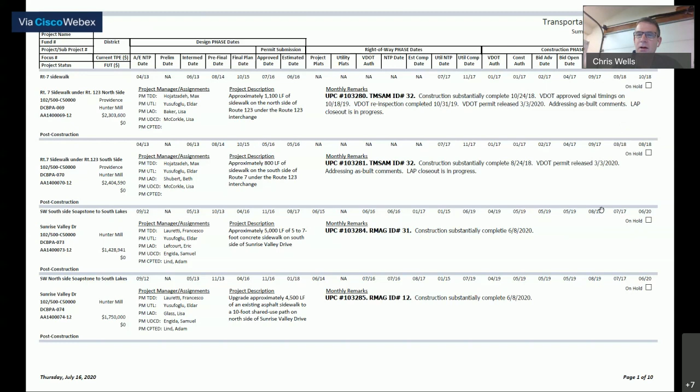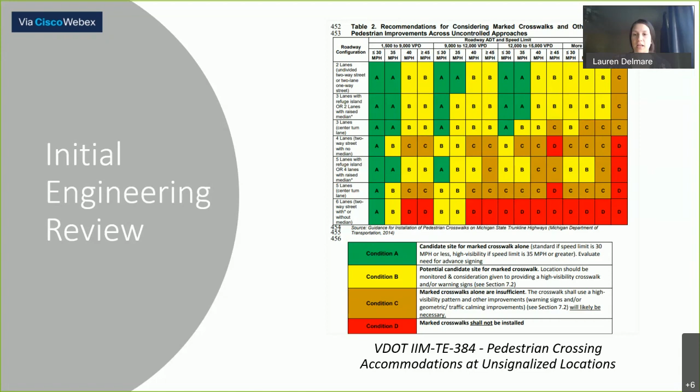Condition D means that under this circumstance, a marked crosswalk cannot be installed. That does happen sometimes with really major roadways, and the only way to overcome condition D is to make it a signalized crosswalk — either a HAWK or pedestrian hybrid beacon, or a full signal.

If there's on-street parking, that sometimes leaves room for a curb extension in the parking lane to narrow the crosswalk. Whenever we have a median, either raised or striped, we look to see if we can get a refuge island. So those are the types of countermeasures we're considering.

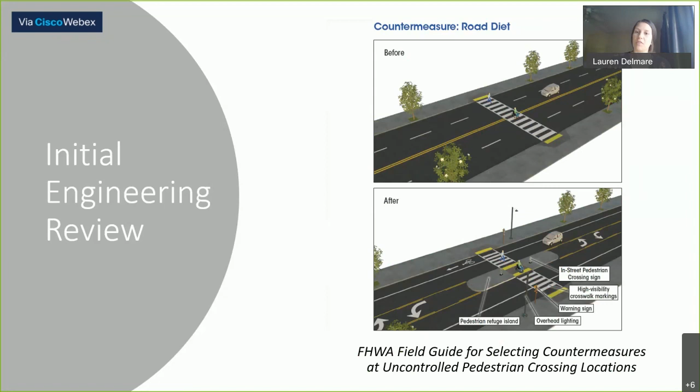Once countermeasures have been identified and we know the cost, we'll document that. Then we come back to look at what implementation and funding opportunities we might have. There's a few that I wanted to talk specifically about today.

The bottom of my list is the transportation priorities plan. That's kind of, we have a project, we know we want to do it, and we're going to need more funding, and we don't have a grant opportunity. That's sort of the last resort.

First, we're looking at the VDOT annual repaving program. Through that, if there's a crosswalk that can just get marked and we know there's demand there, sometimes we can use that program as a means to get that to happen.

We'll also have grant opportunities, so I'll talk a little bit about these as well. There's the Pedestrian Safety Action Plan — we had this in 2018, and it hasn't been renewed to date. VDOT's decided to spend some of their safety funding elsewhere, but there's still potential they'll do this again.

Then we have the Transportation Alternative Set-Aside Program, or the Safe Routes to School Program — those are bundled into one now. Those applications are typically every 2 years; we had a round in 2017, and then another last summer in 2019.

So to talk about the repaving program, this is a chance to add a new crosswalk or upgrade an existing crosswalk to high visibility markings. Those are the simplest things we can do. We can also add crosswalk signage — something Fairfax County does in partnership with VDOT — and we can relocate an existing crosswalk.

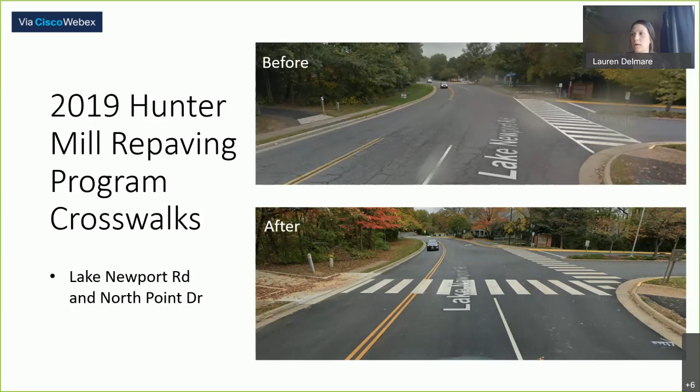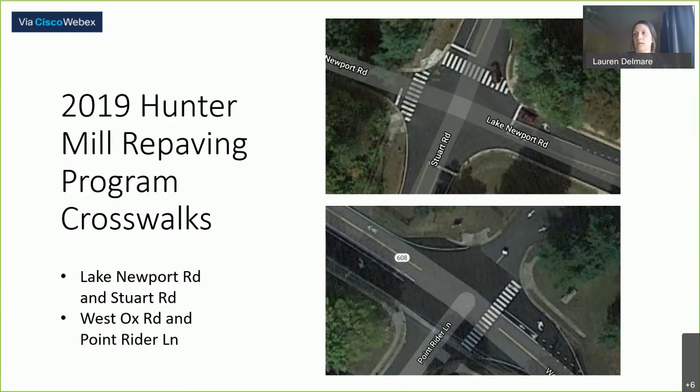This year we're looking at four locations to add new crosswalks: Beulah at Cinnamon Creek and at Abbotsford. At Abbotsford we're leaving room with a painted median to potentially add a refuge in the future if we have funding. At Temporary Road and Old Reston Avenue, we're doing a bus stop relocation for safety as well, and at Glade Drive and Breton Court, which also had a bus stop relocation.

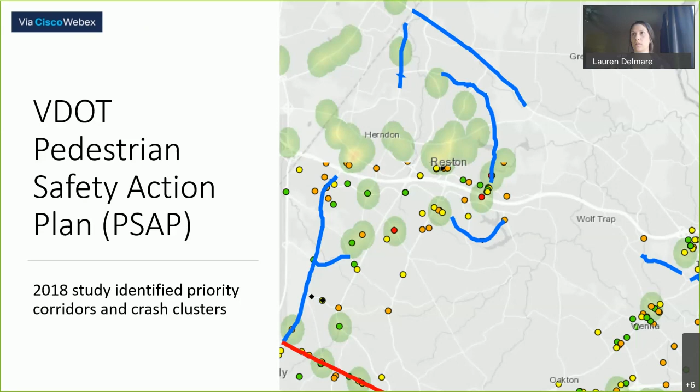The Parkway and South Lakes Drive was one corridor. You can see some of the corridors in your area that were identified through this plan. The funding for the pedestrian safety action plan grants targeted those locations that were either on the heat map or a priority corridor. Applications for these grants opened in summer of 2018.

They had $8 million statewide, and we were granted $1 million based on our applications in Fairfax County. These were quick delivery projects within right of way without utility work, so they had to be done by June 2020, with notification received in November 2018 — a year and a half, which is extremely quick for us. So we worked in partnership with VDOT to make that happen using their contracting mechanisms and design team.

We constructed 14 projects in that time. The scopes typically included rectangular rapid flashing beacons. We had one signalized crosswalk, refuge islands were common, curb ramps associated with these other improvements, and signing and marking improvements as well.

All of these projects had the same scope — adding pedestrian refuge islands and rectangular rapid flashing beacons, most including curb ramp improvements as well. Here are a couple of photos showing the outcome. This is Bluemont Way and Discovery — you can see these rapid flashing beacons; the pedestrian pushes the button and the beacon starts to flash. It doesn't require a stop, but it provides additional warning to drivers and encourages yielding.

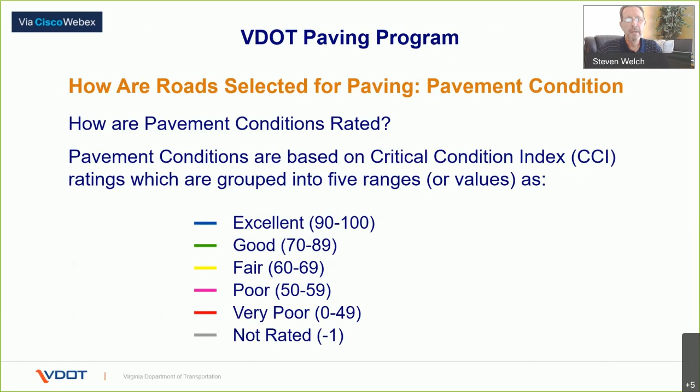These vans have all kinds of equipment on them that are able to determine pavement distress, roughness, texture, rutting. They do digital scanning, digital measurements, both longitudinally and transversely, or across the roadway, even thicknesses of some of the cracks and things that they find. They also have digital video and imagery, and of course GPS for tracking location.

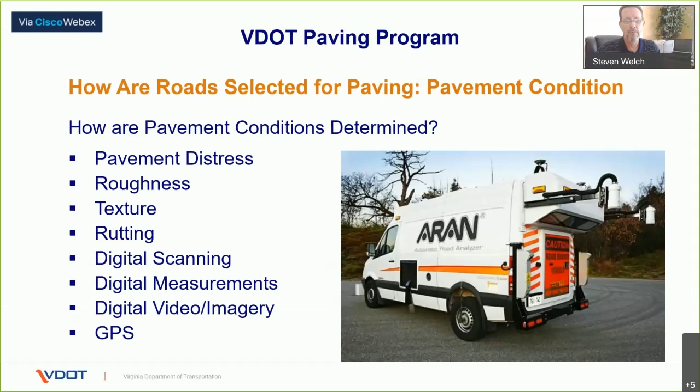All this is put into, as you can imagine, a very large database for our materials engineers and pavement engineers to work with. So the other question we get then is, well, how often are condition ratings conducted?

How often do we go out and look at it? On interstate roadways and primary roadways, we do this annually, every year. On secondary roads, which are largely your neighborhood roads, we rate 20% per year, so over 5 years we cover 100%. But beginning next year, 2021, we will be rating the high volume secondary roads on an annual basis. That's always another question that comes up.

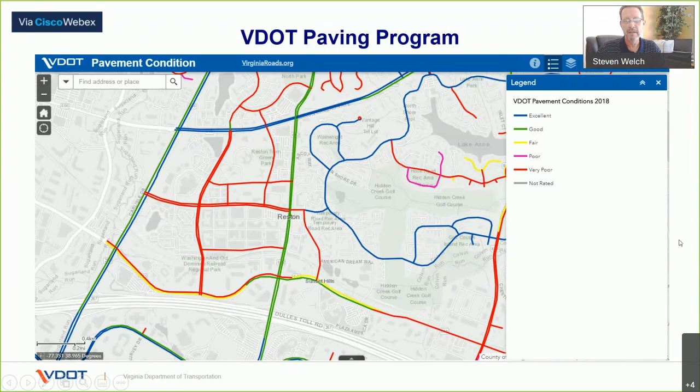But overwhelmingly, you can see that a large number of roads are coded green, blue, and yellow. You can also see overwhelmingly that there are a lot of pink and red condition-rated roads, and those are largely our secondary roads, neighborhood roads if you will. So we know there's a problem, and I'm going to continue to speak to that in a moment.

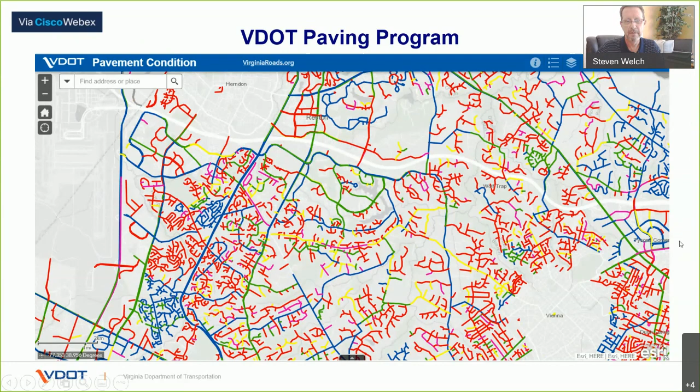So that addresses the question of how roads are selected for paving based on pavement condition. The other component is that we utilize traffic volumes. We've been asked before, how do you use traffic volumes for selecting which roads get paved? The way we do that is for high volume traffic roadways, those with an annual average daily traffic, or AADT, greater than 3,500 vehicles per day on all our interstate, primary, and secondary routes.

We have a goal of 82% of the traffic or roadway network must have a CCI of 60 or greater. On the lower volume traffic roads, those with AADTs of less than 3,500, which are primary and secondary routes, we have goals of 75% and 65% of those roads also must have a 60 CCI or greater. So that's how we use traffic volumes as part of our decision process in which roads get paved on an annual basis.

So we've addressed paving condition and traffic volumes. The other piece I'll speak to is entire neighborhoods versus main streets. There are areas where we may have 2 or 3 neighborhoods with poor or very poor ratings, and we may have contracts out for those neighborhoods, but we reach a point in a given season where we don't have enough money to do another entire neighborhood, even though other neighborhoods are also very poor or poorer. So we may take that leftover fraction of money and work on the main streets through those neighborhoods, to at least get something done, and then come back in subsequent years to work on the remaining streets.

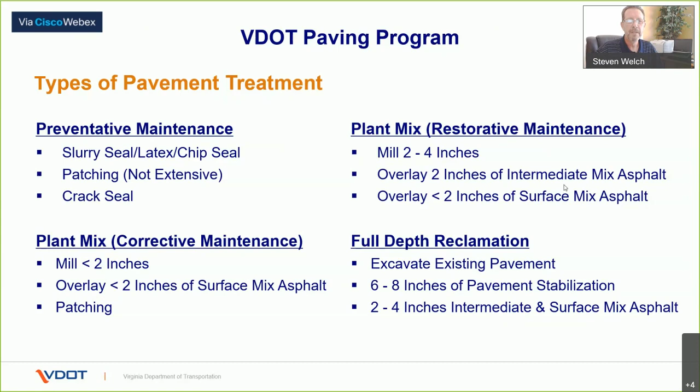The next level up is corrective maintenance, a plant mix where we mill and overlay up to about 2 inches on certain roadways, depending on how bad that pavement is. The next level up, on your upper right part of the screen, is restorative maintenance, which is a little more involved, where we mill 2 to 4 inches, and then go back and overlay 2 inches of intermediate asphalt, and up to 2 inches of surface asphalt. The worst case scenario is full depth reclamation, where we have to excavate the entire pavement, put back 6 to 8 inches of pavement stabilization and 2 to 4 inches of asphalt. Those depths change a little bit depending upon which type of roadway we're talking about. So that's the types of pavement treatments that we do.

So our pavement dashboard, this is our measurement of where we've been. It also speaks a little bit to some of the problems we've had in the past and what we're trying to work our way through. Back in the late 2000s, working into the early 2010s, our budgets were very tough. We had much lower budgets, and our maintenance program and paving program took a hit, and we've been working our way out of that over time.

As of the end of the 2019 season, our primary roads are what we consider 87% sufficient, based on the information I showed in the previous slide. The interstates are at 82% sufficient. That 82% was the goal for our roadways with high volume traffic. But as you can clearly see, the secondary roadways have reached a point over the last 5 years, incrementally moving upward, where we're at 48% sufficient. We're hoping this year to continue that same trend line and get our way up to somewhere in the 55 to 60% sufficiency range, based on the budget available and trying to attack the secondary roads, but also balancing that budget with maintaining the 82% sufficiency requirement on the primary and interstates.

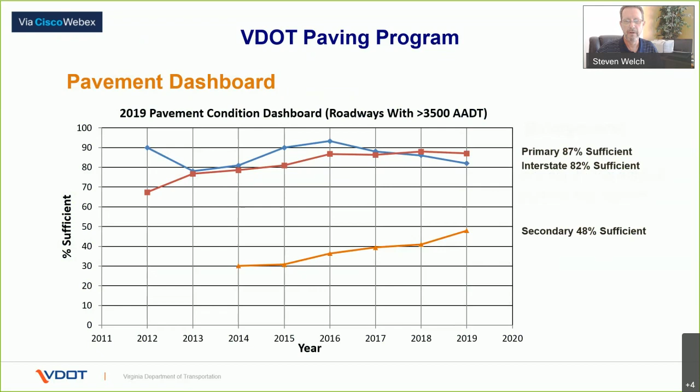Moving on, I want to briefly talk about some facts and figures over the paving program itself. Over the last 7 years, between 2013 and 2020, on the interstate, primary, and secondary in Northern Virginia, our district is comprised of not only Fairfax County, but Prince William County, Loudoun County, and Arlington, although Arlington takes care of most of its own roadways; we only do the interstates and some of the primaries in Arlington. It is a 4-county district, so these are the lane miles. We have over 13,000 lane miles in Northern Virginia. As you can see, for lane miles in the Northern Virginia district, we have over 11,000 miles of secondary, or mostly neighborhood, road lane miles. So to give you some idea, that would be the same as traveling to California and back 3 times over.

Moving down the second row, in Fairfax alone, of Northern Virginia lane miles, 70% of the interstates are in Fairfax County. 53% of the primary roads are in Fairfax County, and 50% of the secondary roads are in Fairfax County. So overall, approximately 52% of the lane miles are in Fairfax.

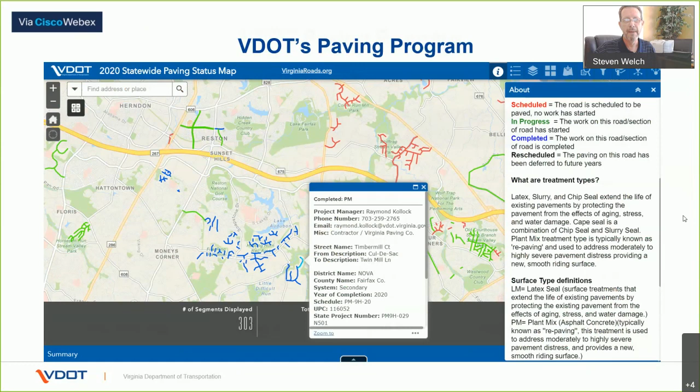Like I did with the pavement condition map where I was zoomed in closer, I'm going to zoom out a little farther on the paving status map. This is the middle upper part of Fairfax County, and you can see we have projects going on all over the county, mostly secondary and neighborhood road projects, but also some primary and some interstate. You can go onto that map and it has various filters, but the map covers the entire state, so you have to zoom into the area you're concerned about.

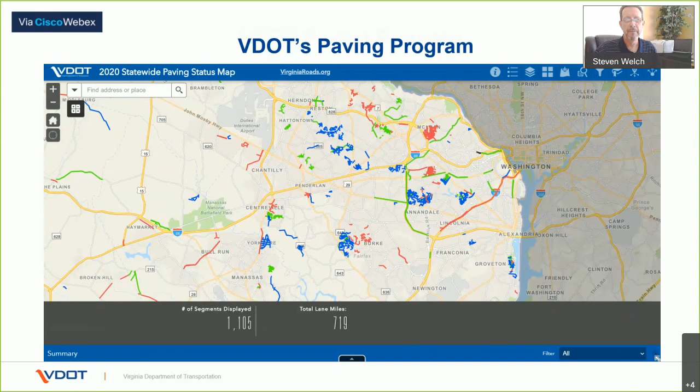Moving on from the paving program, we talked earlier about pavement marking and striping that Lauren and Chris discussed. When roads are repaved, the pavement markings are disturbed and removed during the milling operations. Our contracts are set up to replace them in kind, but in a lot of cases they include some minor improvements we work with our contractors on up front, perhaps adjusting slightly the location of a crosswalk to make it better aligned, or adding some edge lines going around a turn, what have you.

The next bullet point is that we occasionally make pavement marking changes that help in areas where we've identified roadway network and safety operational needs, where we may lengthen a left turn lane if the opportunity and pavement allow, or even create a turn lane in an area where there currently isn't one, if there's pavement to allow us to do so.

And then lastly, we work every year coordinating with Fairfax County DOT to look for opportunities where pavement markings during these repaving projects can be changed to enhance on-road bike networks, whether it's a shared lane, a standard bike lane, or a buffered bike lane. In some cases, we also coordinate pedestrian improvements such as crosswalks, like Lauren talked about earlier, and Chris as well.

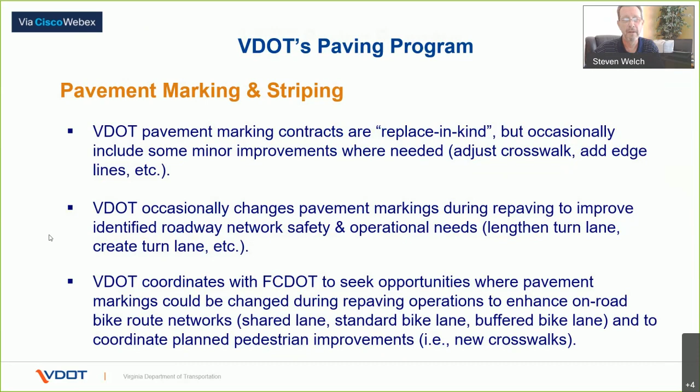So if you have any questions or inquiries, or a problem with an area or a maintenance request, you can call the 1-800-FOR-ROAD number, which is a 24-hour customer service center. We also have My VDOT online, which is a panel that pops up where you can fill in some standard questions or write in your own. I suggest using that, since it really documents the request.

And then the two maps I showed you earlier, both the pavement condition map, which is an online interactive map, and the 2020 paving map, can both be found on virginiaroads.org. Once you get to that location, look at the tab that says web maps, and you can find those two maps as well as many other resources.

So with that, I just want to say thank you very much for the opportunity, and stay safe.

Wow, that was a comprehensive overview, Steven. Thank you so much for that information. Certainly.

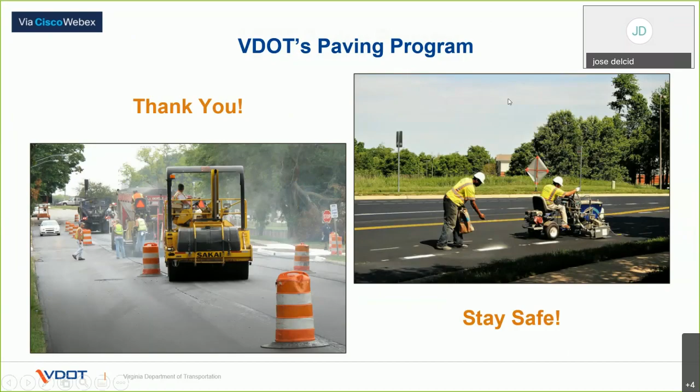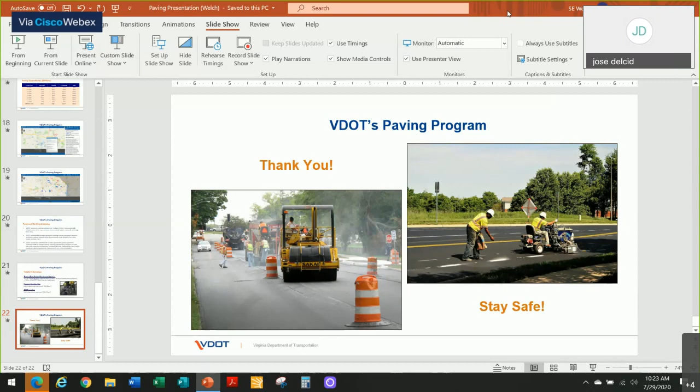This isn't related to paving, but I did have a question for Mr. Welch, if I may, about a road I live on. I live in a new community, about a year old, and the road, Michael Faraday Drive, south of Sunset Hills, apparently is privately owned. Is there a process if you want to try to get VDOT to take over the road?

On privately owned roads, those are taken care of by the HOA. The community together is in charge of maintaining those roads for snow plowing, paving, striping, drainage, and so on for all private roads. The road I'm referring to leads to Nova Community College, some office buildings, and my community, so I'm just curious why it's privately owned. It's not just for my community, it's for all those other entities I mentioned as well.

Yeah, I don't know the specifics as to why it's privately owned. You may be able to talk to a formal HOA if there is one. We do find there are cases where there's not actually an HOA, but there may be 15 homes, and the citizens within that community just share information and work together to solve the problems. But typically there's an HOA community.

So is there a procedure I can go through to try to get the road taken over by VDOT? It's very difficult, but it can be done. It has to go through a process where the community itself actually agrees to take on all of the maintenance of the roads. It then has to go through the Fairfax County Board of Supervisors for approval to be accepted into the state system, and a few other processes. So it's a lengthy process, and on occasion that question is asked, and that's how it's done.

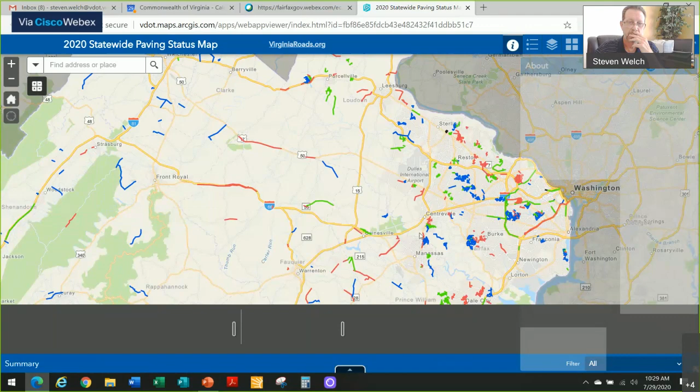And while you're getting that up, I have a couple comments and suggestions. One is, the lady talked elegantly about her long-going concerns, and so did the last gentleman. And somebody mentioned, well, let's talk about it at a public hearing. I suggest that in addition to public hearings, you need to have on-site meetings where, if there are enough people interested in coming to her street and coming to my street, you need to perhaps talk about adding a department or personnel assigned to go out and meet with communities, neighborhoods, or concerned people.

I would like to have FCDOT and VDOT come out to Purple Sage. But if you look at the map that Steve Welch just pulled up, this has been done—you said the project is pretty much completed. I believe it actually is completed. And if you look to the west, that's Walnut Branch, I believe, off of New Dominion. I'm not good at maps, but there's nothing done there. They stopped the work. Am I looking at the wrong map here?

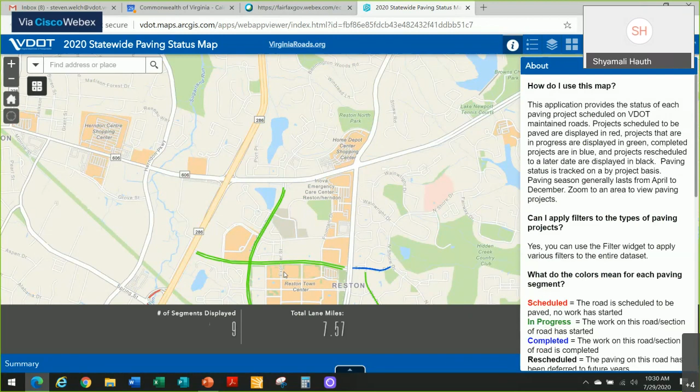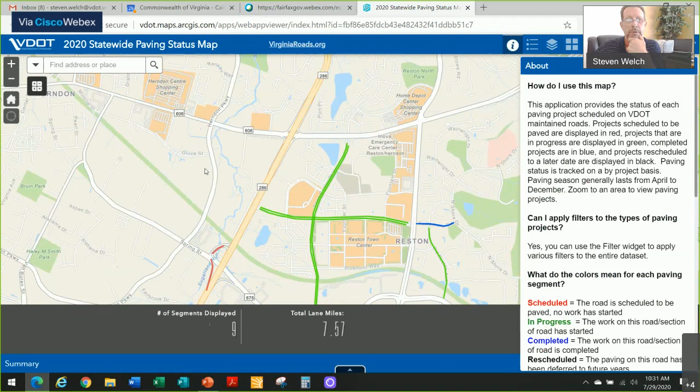Reston Hospital—no, that's not quite the right area. Perhaps it's farther north where we follow New Dominion up to where it meets Walnut Branch. Well, what is the street over there? No. Is there a Walnut Branch on this map? I'm not familiar with where Walnut Branch is, but it'd be better to go back down lower on the map—you'll see nothing, even there, nothing's going on the left-hand side. I don't know if that's Herndon, but where we are, on the west side, there's nothing being done, even up to Route 7.

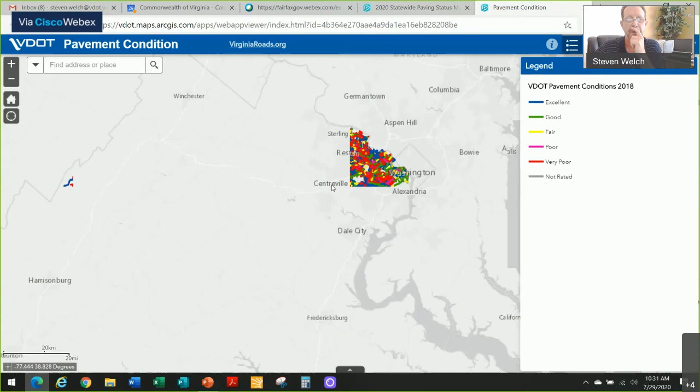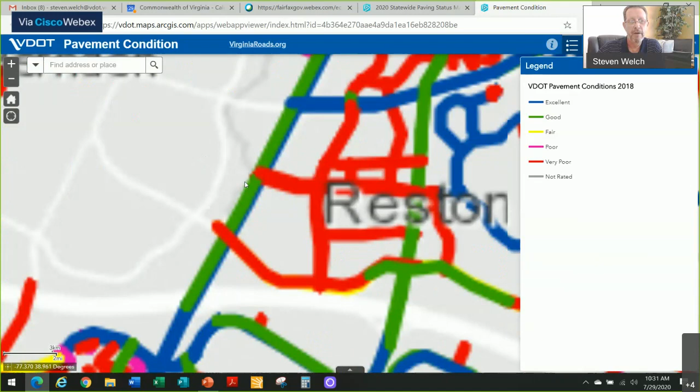There's something going on here. But let me explain a little bit further. I'm going now to the pavement condition map, and I think I might have the answer to that. So this is the live map you're seeing, where earlier I had the screenshot, so bear with me. Now I'm closing in on Reston. So Reston's right here, and I mentioned New Dominion—there's my arrow moving around the screen. Steve, I see Walnut Branch is red. It's just north of Baron Cameron there, on the west side of the parkway, the red. Right up here? That's east. That should be east side. Oh, there it is, I see it right there.

On the west side, yeah, there's the west side. So what does red mean? Red means it's very poor. Go look it up.

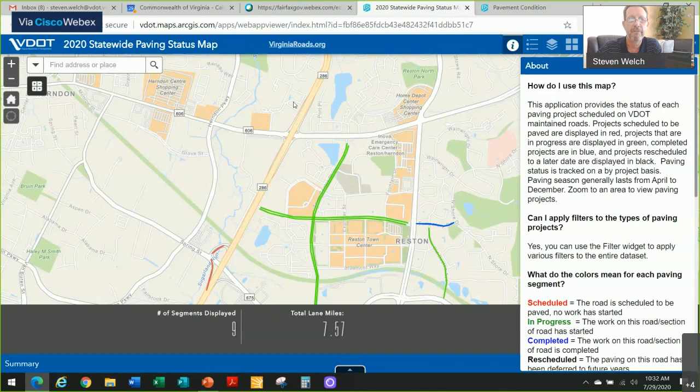I want to know the road that goes to North Point. Lake Newport is another one that was done. Lake Newport Road has been redone, and you just did the west side of that.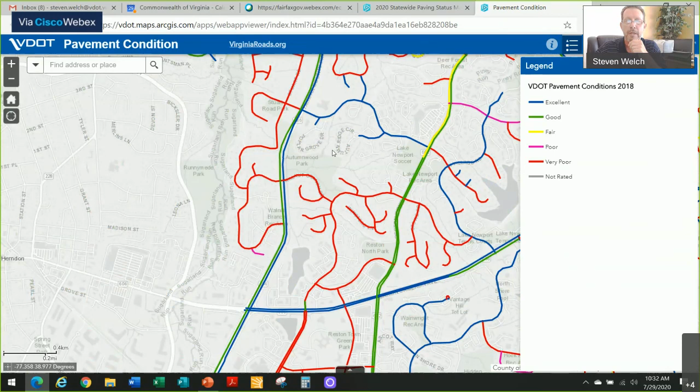So if you said just did, let me clarify - do you mean this season? What do you mean, season? Yes, they mean last season, last year. They mean it was just recently done.

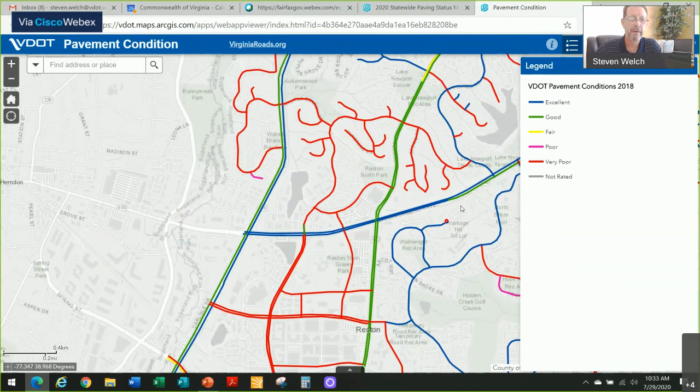So the condition map you're looking at here reflects the condition through the 2019 season. Until we're done with this construction season, which runs from spring through the end of fall, this particular pavement condition map will not be updated. For example, I'll use Town Center Parkway and New Dominion - on this condition map, these will not show as being blue until next season because this is the condition map through the end of last year.

Okay, so it's an active map. So obviously we'll update that over this coming winter, this condition map, based on what we completed this construction season.

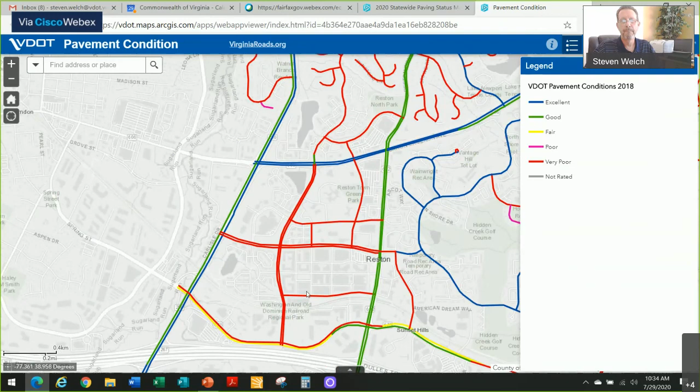Well, can I make another point? If you take New Dominion down to where the new Reston station is being built, Sunset Hills - I don't know if this is appropriate for this meeting, but the walkway access when people get off that, when it opens and people get off the metro stop, it leads them up to Reston Parkway, up to Microsoft and Oracle. What about the people that want to go to Target, the YMCA, and that shopping center with Chipotle's? We got to get off where our feet are tired, trudge two blocks in the wrong direction, go down to the ground, and walk over to Target or the YMCA or the shops to eat dinner. Why didn't that go towards the shopping center?

And then I have a question about tunnels. All of these places where people - at the new Wiehle station, there are no tunnels. I've been using that station for 35 years, since I've been going downtown via the 505.

I used the Silver Line before I retired. There, if you park by the Wiehle parking, say at the power lines across the street, you either have to run across the street and take your life in your hands, or go to the intersection, push the button, and do it legitimately - but you've got people turning right on red, and you're more likely to get hit using the traffic light. Where are the overpasses and tunnels?

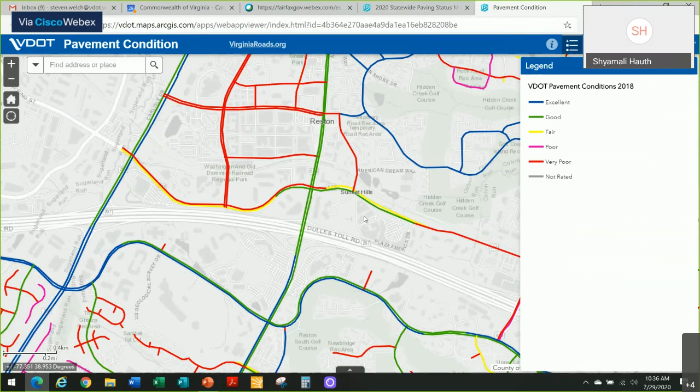We've got tunnels all along Reston Parkway that were put in 50 years ago, and there's some at South Lakes that go under. We don't even know they're there, but for the people that live there, it joins communities, or keeps them joined, because when a road goes through and gets widened, the people on this side of the railroad tracks don't go to the other side. Tunnels can't be that expensive, and they're much safer and more convenient. Why don't we put some tunnels through? Why didn't we put tunnels at the Wiehle metro station, and why aren't we putting them at the Reston station?

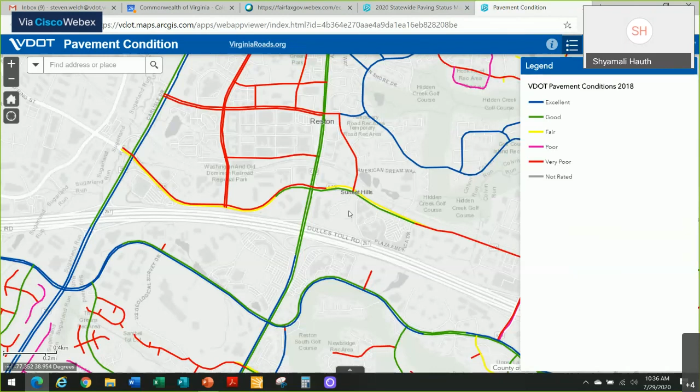So I'm going to defer to Chris, if you don't mind, about the connectivity with sidewalks and pedestrian connectivity, since that's away from the paving presentation we're here for.

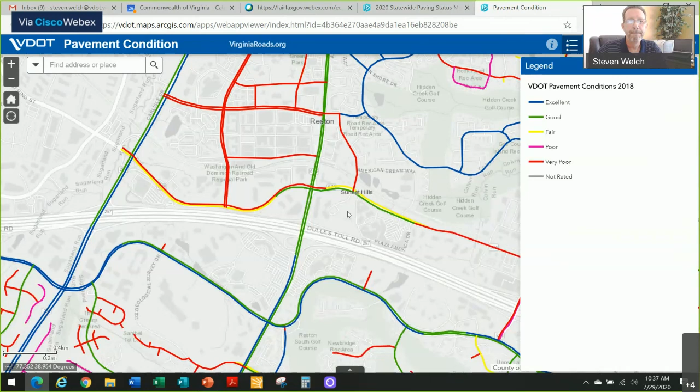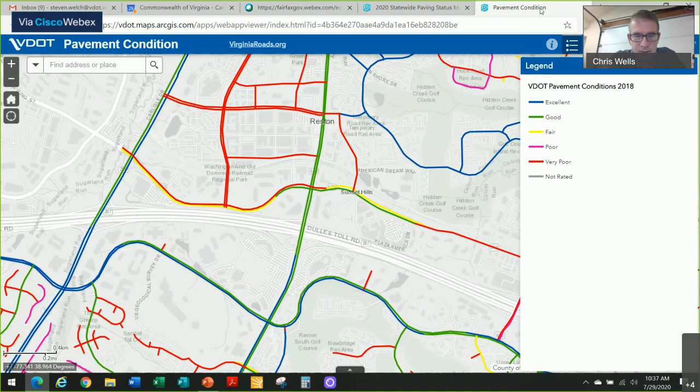Sure. Well, tunnels are actually somewhat unique to Reston - we are doing those as part of the I-66 trail project. We do realize that separate grade connections are safer, but for instance, the bridge for the W&OD over Wiehle Avenue is $13 million. So tunnels are not that expensive compared to that example, but they do need to be built as part of the roads themselves - typically they're built as part of the roads.

I know that Supervisor Alcorn has a group looking at the Wiehle Avenue corridor, studying options for better crossings. I'm also aware that whoever's consolidated the southwest corner of Wiehle and Sunset is interested in building their own bridge across Sunset to our new bridge at the W&OD. So there are possibilities in the future, but it is not something that is typically easily done or cheaply done.

Well, again, I agree with what you say. If it's done prior to the building and proffers, why weren't they required to put tunnels in all along there? Because you don't want to go 3 miles to a tunnel, go under it, and walk 3 miles back. You need tunnels every few blocks. If you look under Reston Parkway, there are tunnels a couple blocks apart.

So why aren't we requiring these people, these moguls, these big builders, to come into our communities and make profit off of us, and tell us how to live?